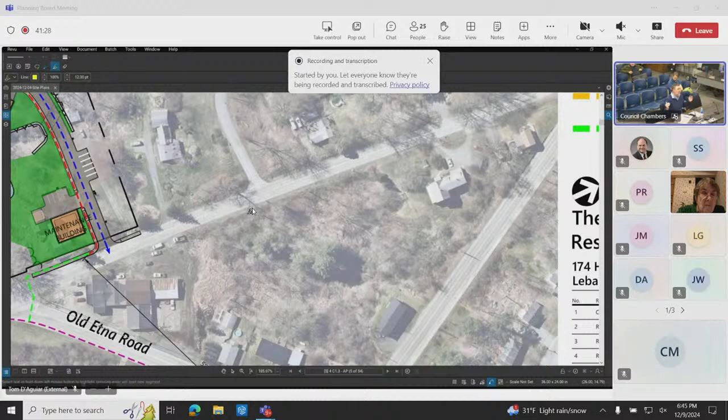Again, surprising that there's no public sidewalk there now. But that's something that, in talking with the applicant, we put in the PBAC response letter—there's a commitment to, whether it's funding or studies, because if you walk that, it's a steep slope down the side, there's wetlands, no right-of-way survey has been done. There's a number of unknowns there, so there's not really a position to commit to constructing anything, but I think it'd be important, whether it's part of this project or part of a city's future plan, to understand what's going on. I think there was some commitment on the applicant's part to commit to doing those studies, or working with the town or the city with a kind of fair share contribution there.

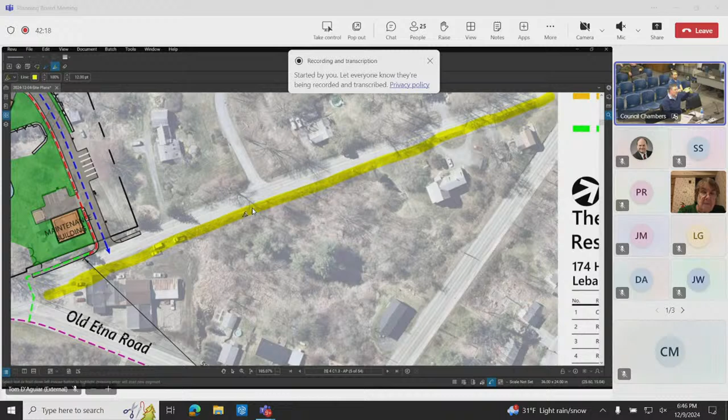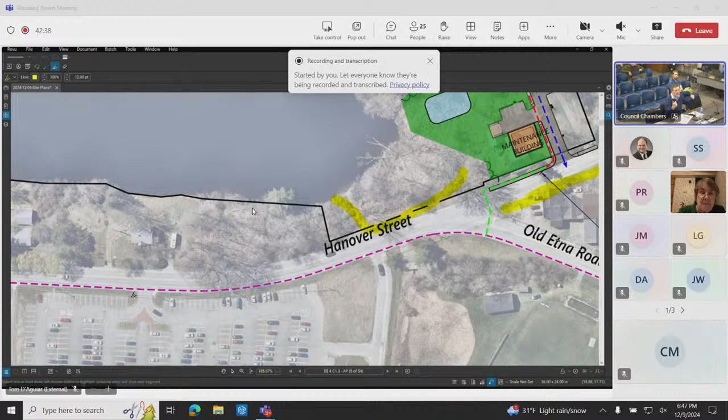I'm not sure what the benefit of wetlands or clearing trees or taking away any screening from the residents on the west side of the street would get you when you have a duplicate walkway on the other side. So I think that's why we're focusing on the crossing and the potential to provide some additional studies or surveys

on the Hanover extension. Now, the crossing is the green line. That's the green, yeah, thank you for making that a little brighter.

And I think there were fitting comments about operationally, how does this work with crossing guards and things like that. But I think the important part is that people have to cross this intersection now regardless of the project, and this would be a benefit to get some defined crossing there.

And again, working with the city with the right-of-way there and getting folks across. It's another one we could look at, whether it's advanced warning signs and things like that. We've worked with RRFBs up on Mount Support for the flashing. Those are all things that we can work with the city on. But the way we're looking at this is that we're committed to doing this, but it's within the city right-of-way. We want to make sure that it's something that's fitting with the city's designs and long-term outlook for that intersection.

So again, the project is presently committed to enacting the green line to create the crosswalk, ultimately crossing Hanover Street and then crossing Old Etna.

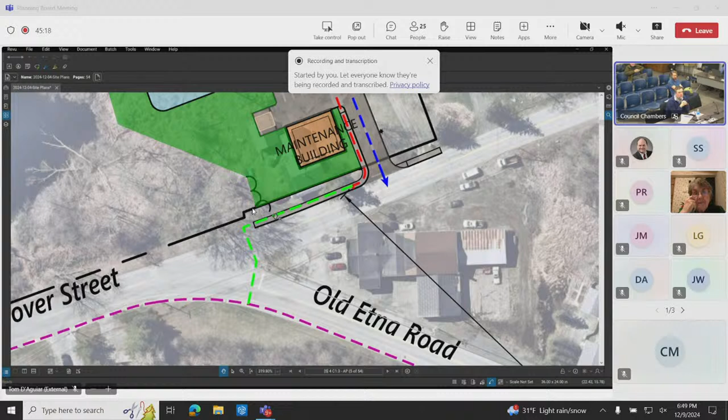Mr. Chairman, if I may, there's reference in some of the paperwork to an island in that triangle, and I just can't tell where the island is, can you zoom in? What is meant by that? Yeah, it's really hard to tell.

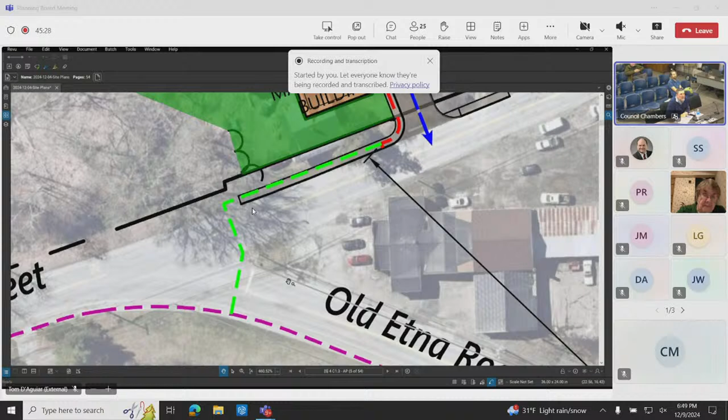So basically, can you just outline that, Tom, do you mind? There's an existing island out there, so you'd want to have the crosswalk come and then have a little refuge there to come across, just so you're not crossing two streets at one time.

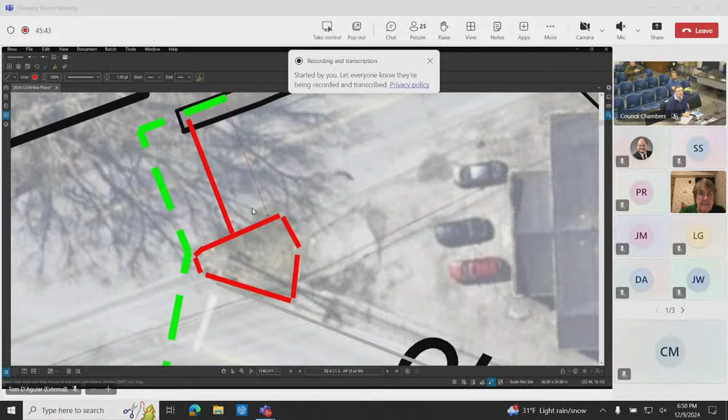Okay. And this is why I'd like to see it in the plan set, because then we'd have detailed scale. I guess I could put it in as a draft.

There's some right-of-way, potential coordination with the owner that the city would have to do, because that right-of-way goes right to that corner for the property of the garage.

Just be aware, to address Mr. Fort Burley's comment, you can craft conditions precedent whereby an applicant can come back to the board with final designs related to any one or more of your conditions. So just be aware that that's a possibility.

I don't recall there being a fulsome presentation of the walkability and the way that that's being handled. I don't think I missed it, but maybe I did.

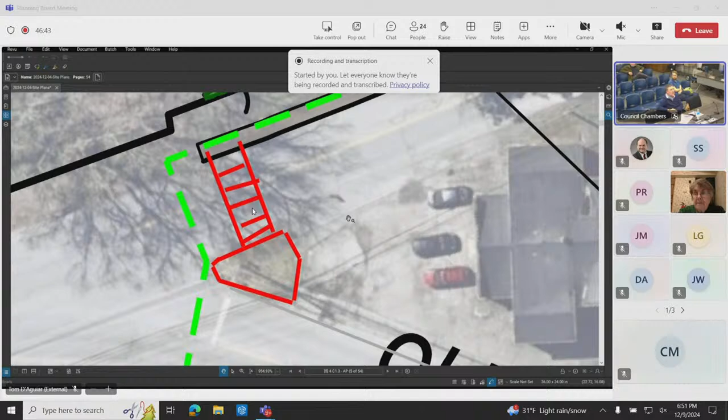Well, yeah, if you zoom out, Tom, this plan was included in the plan set, and I thought we walked through it, but basically there's the full sidewalk on the east side at Hanover Street. That goes down to Old Etna, and we pulled this plan together too to show some improvements that you would be adding above and beyond existing conditions.

Yeah, and those are all existing there. Okay, and then our crossing of Hanover Street is a new one. And our crossing at Old Etna in Hanover, that extension that goes from there, the Old Etna crossing up to the property line.

And then that walkway goes up, and we've shown parking for trailhead parking, but that's also accessible through a walkway to come up that parking lot.

But anything we do for crossings will include the MUTCD standards for advanced warning signage, like crossing ahead. What is the stop control you just mentioned? Stop signs. No lights.

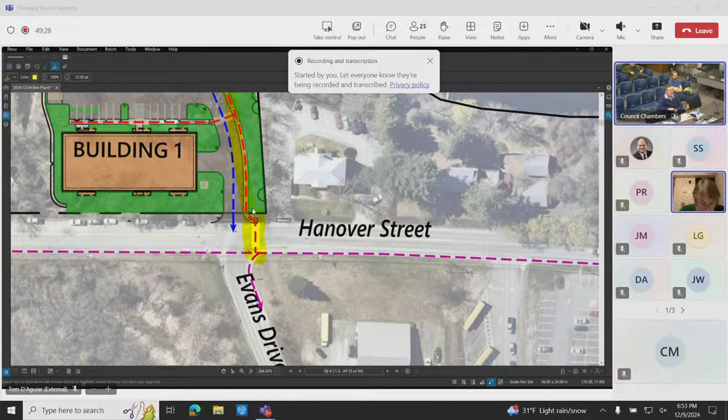In a related question, if we look at the south end of Hanover Street, there's that pedestrian bridge. I'm wondering if the applicant has any interest in aesthetic changes between the development southern access road and the pedestrian bridge, possibly including lighting, landscaping, signage that would indicate to residents of this new development how easy it is to get to downtown, like some wayfinding.

Promotional wayfinding, maybe something to make it look shinier. If you look down that street now and didn't know what was there, it's not welcoming. It wouldn't have to be a whole lot to make it more welcoming, but maybe some lights and limited signs, some welcoming signs there. I think that makes sense, it's going to make sense for the residents anyway, kind of like how you'd manage traffic, we want to manage the pedestrian flow too.

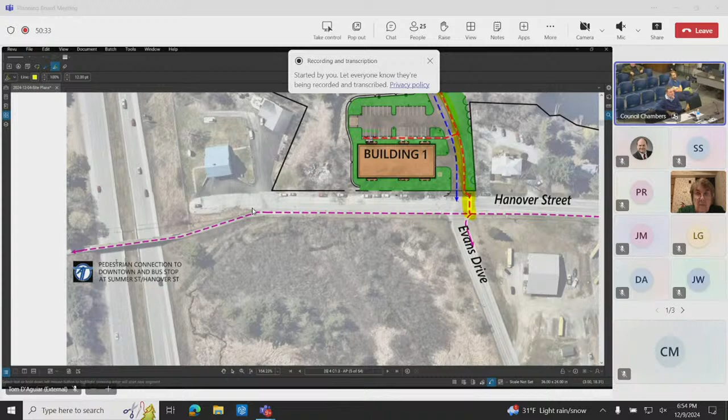Do we know who owns the piece of property that immediately abuts that bridge? On the south side, find out. On the east side it's the car dealership. It's wetlands all the way there, I think. You go off that edge and it's immediately wetlands down to the road.

Does that require any involvement of those parties with respect to alterations of their property? Certainly would if you did. I made a side comment and missed the critical piece of the conversation, what are we talking about? Wayfinding, sprucing up the landscaping and other means of dressing up the entryway to the pedestrian bridge, making it more welcoming. We're looking to the applicant to provide us some support for that, however, he doesn't own the land.

Right, we can, as long as there's signage in the right of way. Yeah, how far does the right-of-way extend? It's not on the GIS, so I don't know. We can figure it out. If the GIS is to be believed, there is no right-of-way. Yeah, that's right, that stuff you never know, it has to get surveyed.

Yeah, we could assume it's a 50-foot wide right of way or something, but it's pretty tight there, I think.

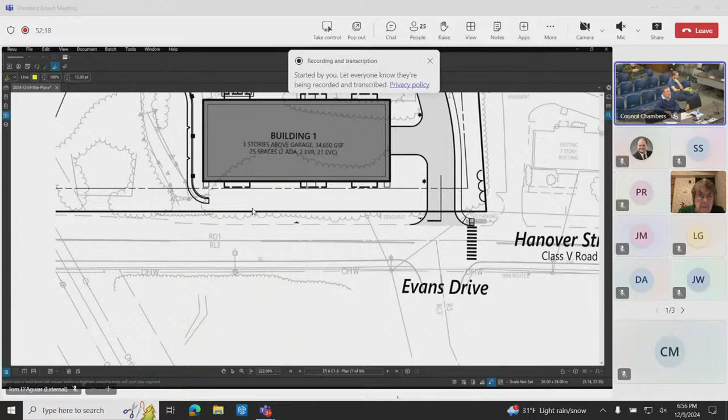You know that strip on the plan on the north or west side is the sophomore lot? That's where the sophomores park at the high school - there's 20 cars there, that's what they call it. During school, when the high school is in session, it's parked up full. In the beginning of the year not so much, but as people's birthdays turn and they can drive to school, it gets full. By the end of the year it's full. That's how things are and how they've been for a long time. I don't know if that affects any of our plans for that stretch.

You can see it on the aerial - yeah, that's the sophomore lot photo, there it goes. I can almost guess the time of year from the trees, but also from how many cars are parked there. In front of Building 1? Yeah, it will be in front of Building 1, from the old Comcast entrance basically to our entrance.

I have nothing more on walkability. Does anyone else have anything? I just want to come back to that island for a second.

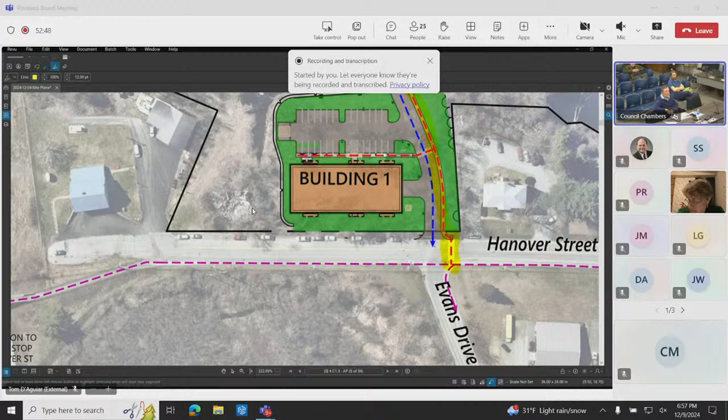So this is a straight shot just directly across the road at the southern entrance, right? But if I'm not mistaken, what was just drawn in at the northern entrance, that's a two-part crossing, is it not? It is, because of the limitation of the wetlands as we have to cross there.

Yeah, that makes it a more complicated crossing. Would you agree it's nice to have the island there, so people who can't make it all the way across have a place to stop, because it is a greater distance there? I'm wondering if that's the natural crossing of that road.

That's what I'm asking. The other problem you're going to run into is as you come down Old Etna Road to go onto Hanover Street, you pull very far forward because, if you're like me, you're not so flexible, and you're looking over your right shoulder because you have that angled intersection. So wherever you paint the crosswalk or stop bar, it may be disregarded.

I mean, I'd look at what people are actually doing. I'm not sure how to solve that. But if you draw it like it's drawn there - let's say, I would say if you continue it down when you get past the old Etna...

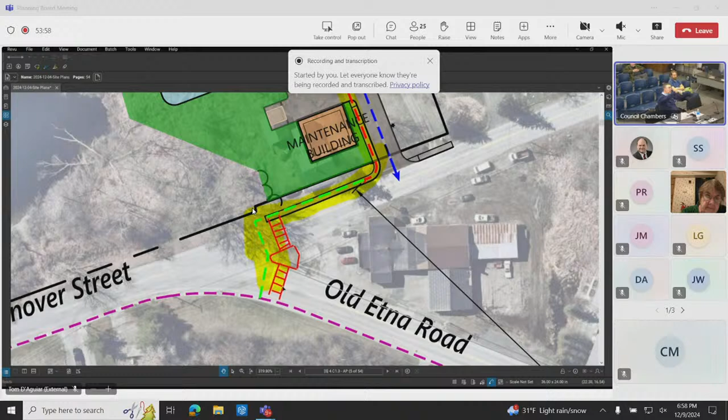...and maybe where the T is in Hanover Street, having a crossing over there, is that what you're thinking? I guess we'd have to look at the feasibility. Right now I'm talking about if you're going down Old Etna Road from the bottom right-hand of our image, up to, well, I'm saying that center would be a more optimal position.

It is, if you would have it down there. I mean, yes, you would have to fill in wetlands, but hopefully with more advanced warning signage and things like that for the crossing, and actually having something defined.

Yeah, I think that's a pretty wide open driveway for that existing owner. Yeah, it is a challenge. Another element that's probably not relevant - there is an open DES remedial site at that dealership. You're aware of that, so when you start digging, just know where the storage tanks used to be. We prefer you not dig at all there. Yeah, well, fair.

Anything more on walkability before we move on? Would traffic patterns be included? Traffic is next. Okay.

Also, I've got one more thing on walkability - the idea of the crossing guards. As far as the schools go, there is a crossing guard presently at one of the intersections. There is not one, I believe - someone correct me if I'm wrong - at the northern one. There are students who cross that way, not as many as cross at the southern one.

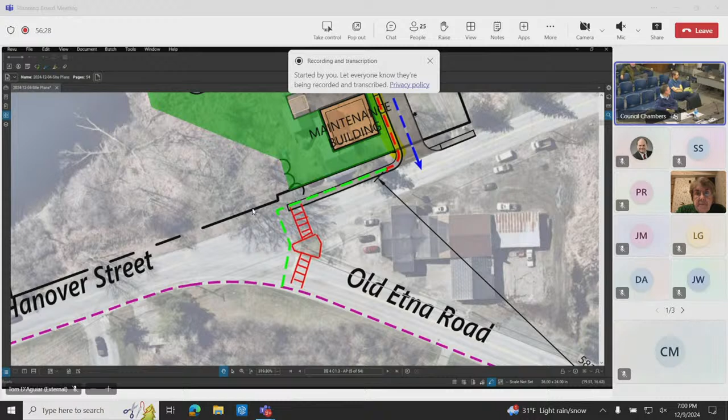Well, not exactly, one's already there, but the crossing guards, to my understanding, are hired by the schools. I thought so, but are they hired by the city? Because there's an ad on the city website for a crossing guard position. I thought they were, but I never looked into it, I just ran into that by chance. But right now there's an open position. I had assumed it was the school district also, because it's been covered in a pinch by the police and by the school principal.

And I'll go back to the layout of the driveway entrances and distribution. The intent would be, where we're showing that crossing, that folks are coming out and taking lefts—not there, can you go to the north one—that they'd be coming out and heading left, because anybody heading down Evans on the other side would be coming out the southern entrance and going straight across. So these are laid out to try to minimize the traffic from the site between those two driveway entrances.

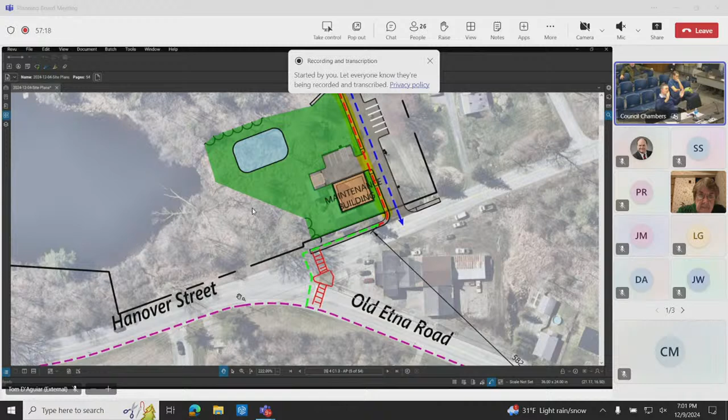Yeah, it's gonna create, for most of those kids, a driveway crossing that may carry as much traffic as the public roads in the morning rush hour, between 7 and 8. And it's not necessarily the case that they'll turn left, because the other direction's intersection is sort of congested. So if I'm in a hurry trying to get to work, I might just head down Hanover Street and take a left onto Evans to get out quicker and avoid Heater Road. Right, it's not completely eliminating it. It won't be all the traffic, but not everyone will work at the hospital, and some will come out the north entrance and head toward I-89.

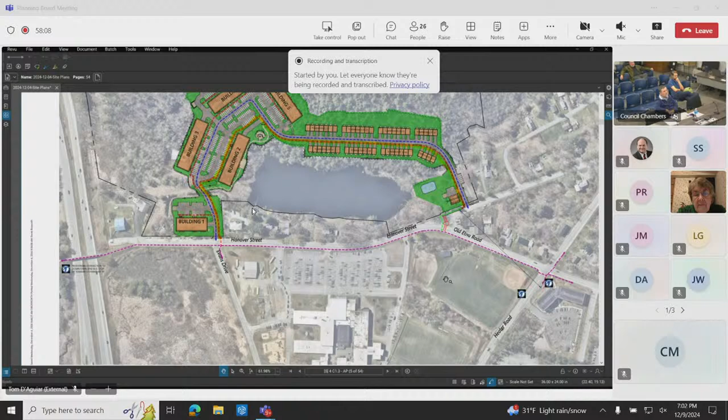Can we double back to the lights, just by virtue of the concern that's been raised? These lights flash, and the command is to stop on flash—is that how these lights work? Like the ones in front of the middle school, yeah, the push-button ones. You push a button, the lights light up, and there's a sign that says stop on flash. Okay, thank you.

Is it okay to ask a question about the parking places just inside the north entrance there, and walkability? Because that's advertised as a place where people could leave their cars to go up to the trails further up. Yes, those parking spots are available to the public. All six of them, that's all—those have all been added for trailhead parking.

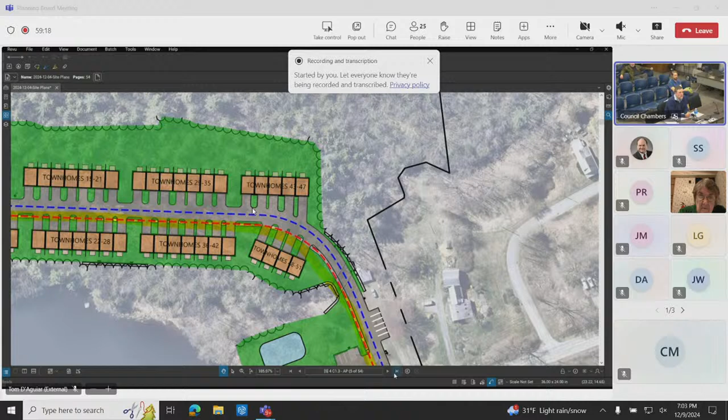Okay, I have a quick question about the trailhead actually. Can I jump in on that? Very quickly, sure. I noticed on Plan C2.3 there's a trail listed as approximate Upper Valley Mountain Bike Association Trail Connection. Does that trail connection stop at the end of the property? No, there's already one up there in the GIS, so we wanted to add the extension to show how you could connect to it. So it does connect all the way up there, because there's a trail network up there that seems like it's on the other side—it's a very large expanse. So we took that to show how you get there, assuming people are using a similar route.

Is the applicant proposing to construct that trail extension—clear it and make it walkable? You can see where it is, that yellow line is where it is. So is the applicant suggesting they're going to commit to clearing a trail not only up to their property line, but to work with, I believe it's Dartmouth that owns that property, to clear a connecting trail all the way up to the yellow line?

That hasn't been anything we've discussed. Would that be something you'd entertain? It'd be a lot more connecting to the trails if it actually connected to the trails, if you know what I'm talking about. Yeah, could you jump in on that?

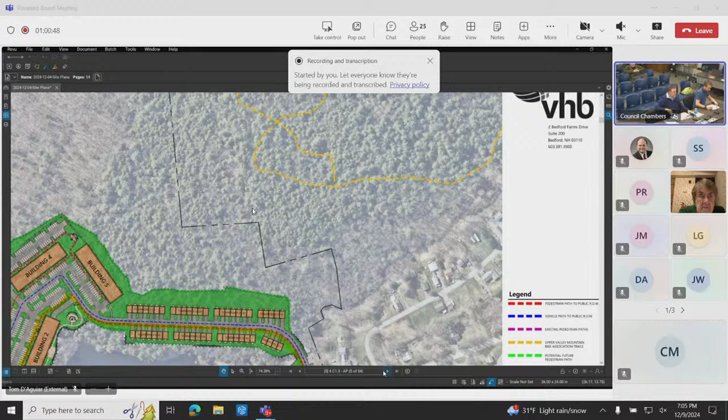If you wanted to come and actually talk into a mic, just so Paula can hear, and you'll need to say your name as well. My name is Sean Dietrich, I'm a member in good standing of the Pedestrian and Bicyclist Advisory Committee.

In the letter from the applicant responding to our committee's questions and comments, they stated that 6 parking spaces have been added at the southern driveway to allow for public access to the trail networks, and a connector trail will be provided to the existing trail network. This has been clarified on the updated site plans.

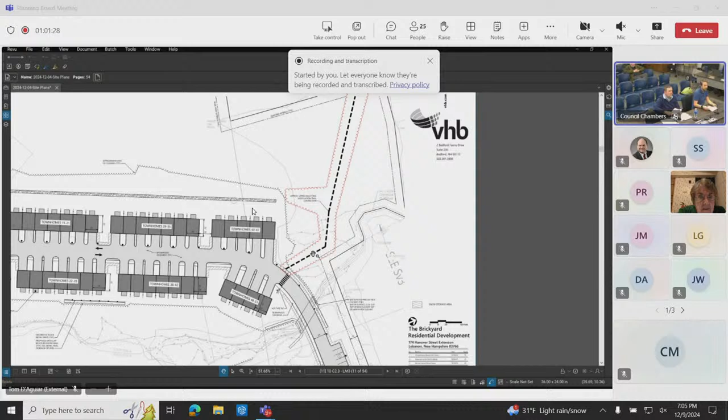So I guess there's no commitment beyond the property line. Do you know if the trails are some distance from the property line? They're not very far up. Is it the northern entrance? Yes, the northern entrance.

There's one trail specifically that sort of loops down, makes an arc towards the proposed development site, and gets pretty close to the edge of the property line. From what I've seen, yeah, it looks pretty close.

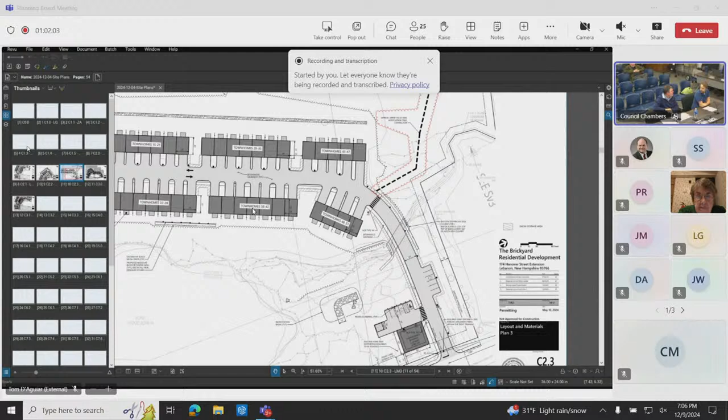Do you work with the Upper Valley bike group? Not directly, but I know on some of the other properties they've asked for access to work on the trail, so that's something we could reach out to them about. I really think they're actually constructing the trail at 343 Mount Support. Oh, okay, cool.

On Table 7, the capacity analysis shows the 2025 no-build and 2025 build scenarios at the intersection of Hanover Street and Evans Drive. The Evans Drive westbound approach is currently level of service E, and with the build it'll be level of service F. The south side driveway eastbound approach, which I believe is the south exiting, where everybody's just assumed to drive straight out of the development onto Evans Drive without complications, I don't understand why that level of service is an F if it's just as simple as driving straight through.

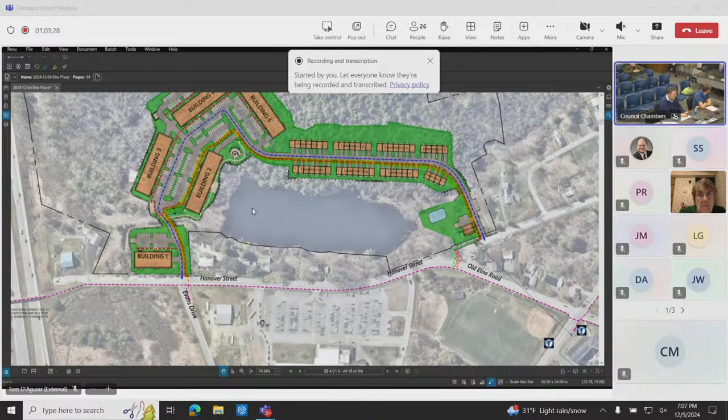We've got Jason Plord joining us on the phone. Can I make a request, if possible, for the applicant to zoom in on the intersection being discussed, and as you were doing with the drawing of the intersections and crosswalks, draw the movement we're referring to? I think that would be very helpful, at least for me.

So very quickly, the difference at this intersection of Hanover Street and Evans Drive shown on screen is that we're proposing a fourth leg to the intersection, whereas over at Old Etna and Hanover Street, that's just a three-legged intersection. When you introduce an additional leg to an intersection, you introduce additional vehicles considered conflicting movements, and that affects the operations of the intersection.

So if this says south side driveway eastbound approach, isn't that the people exiting from the new development? Correct. So why is it a level of service F if it seems like it's just simple, going straight forward? When you have a single lane approach, all the vehicles are in one lane, so it doesn't matter if people are turning left, going through, or going right. If that first car is going to turn left, even though most people are going through, any second or third vehicle trying to get out is going to be stuck behind that first vehicle trying to turn left out of the driveway.

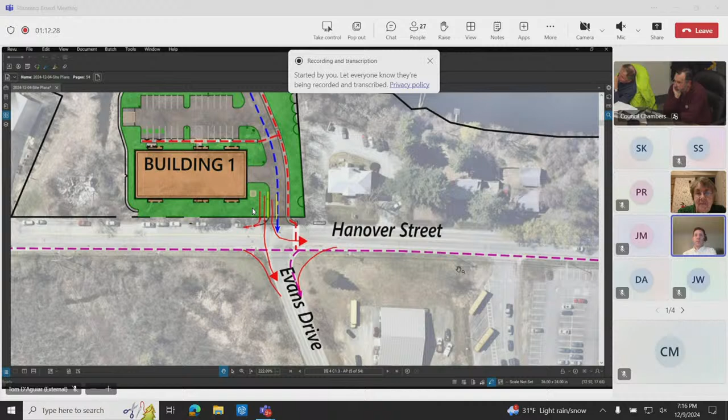What if you just make it a no-left-turn allowed and force everybody who wants to turn left to take the north exit? They certainly could do that. I think that by placing this intersection under an all-way stop, that's a big safety improvement for this intersection. I agree. And with that, introducing the crosswalk, I think that's a win—that was something we had talked about early on in the process for the development program, that the city was actually considering placing this intersection under an all-way stop.

Jason, can I interrupt you real quick? Tom, is Weston and Sampson on the line? Yes, they are. Can we just get— it'd be nice to just absolutely get some— yeah, because you're talking, feel free. Again, I appreciate the extra detail, just want to make sure Jason's following the protocol. It was reviewed—I just wanted to make sure we're not venturing too far off from what Weston Sampson has reviewed and already provided input on. So I don't know who's on the line.

Hi, I'll introduce myself—I'm Doug Osler, I work for Weston and Sampson. We're contracted with the planning board to provide our review and recommendations regarding this development, as well as to help assist in interpreting information so you guys may be better informed when making decisions.

I did hear some discussion about the all-way stop versus having additional lanes. In our opinion, when reviewing this particular location, we agreed with the improvement of an all-way stop, particularly for pedestrians crossing the road—school-age pedestrians, and any biking over that overpass getting to school. It just creates a better condition for the crossing.

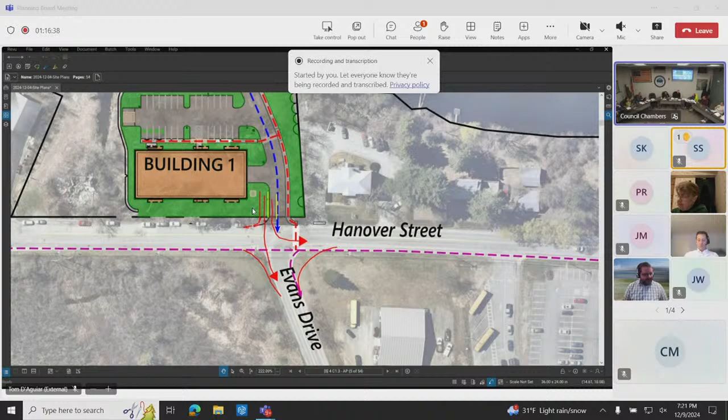The thought I had before Doug joined was that a four-way stop with a single lane at each approach point would be a more predictable experience for the pedestrian. Unless we're planning to go multiple lanes governed by an actual traffic light, which is not in the plan, we may have the best option that safeguards pedestrian safety at the crosswalk.

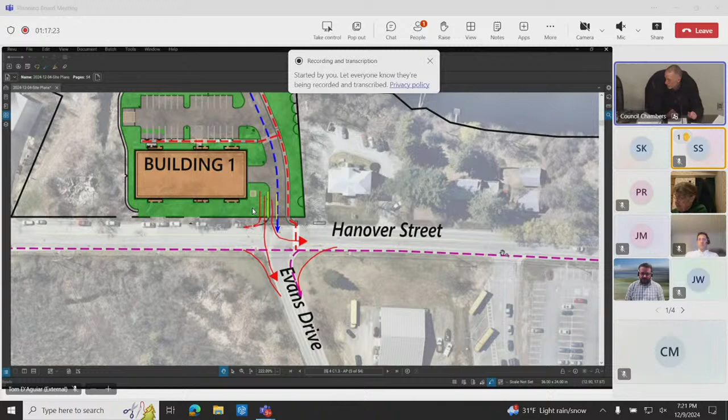Other traffic questions? I have a couple myself but don't want to step on others' toes. With respect to a pending study on Route 120 and its potential effect on the development, is there precedent for the approval to have a caveat that this study is outstanding and that you might be re-invited back to the design? Well, I think we have a scenario without the 120 improvements, right?

Correct. So our opening year conditions, the 2025 conditions, do not incorporate the Route 120 improvements along the corridor. The 2035 conditions do include the Route 120 improvements.

And just so I get this on the record, the traffic study has been submitted to Chris Turgeon at the New Hampshire DOT district office, so DOT does have a copy of our traffic study. I think your question is, if in 2035 that project gets pulled, what's our evaluation, our recommendations and mitigation? What does that look like in terms of future proofing for the city with respect to the plans you're pitching for this development?

And do they reasonably cover the present conditions as well as the 120 happening or not happening conditions? I hope for all of you that the 120 improvements happen. It's got to happen, right?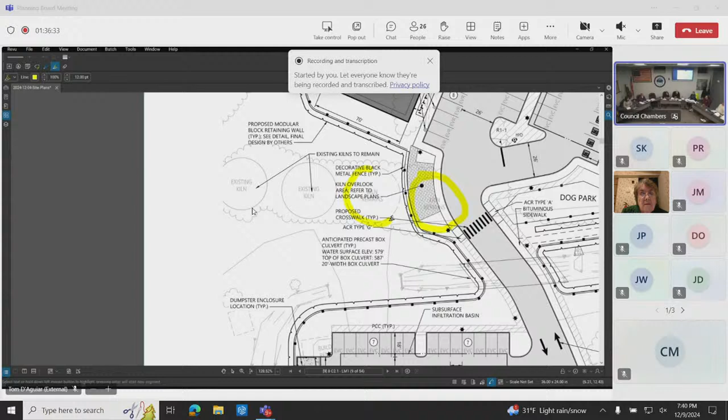Does that include all open space? The whole PURD definition of open space? I wasn't going there yet - I actually have a very pertinent question that I think needs to be asked today so that it can be addressed.

May I just make one comment about the kilns? Yes, please. Another resource we still probably have in the area are some of the people that actually worked there. If there was research being done or work that needed to be done on the kilns, there may still be people alive and around who've done that at that site, and which might be known to people on the Heritage Commission.

Well, in the film of this - but as far as the developer being able to, or the developer's consultant being able to contact those folks, it would be through Heritage, correct? Or through watching the film. Probably, but not through the board - we don't have those contacts. Thank you, though, Kathy.

There was a comment made earlier in the hearings about preventative maintenance for the inflow and outflow of the pond, at the points of crossing. We would probably want to see it as a condition of approval that there would be a maintenance plan for that. I know the developer has been very responsive to the as-need calls from Dr. Croner. But for this, we would want to see a condition of approval around a preventative maintenance program. And this will have an AOT permit associated with it, and as part of the AOT permit, there's a required operation and maintenance inspection. So there'll be regular inspections of outfalls and things like that.

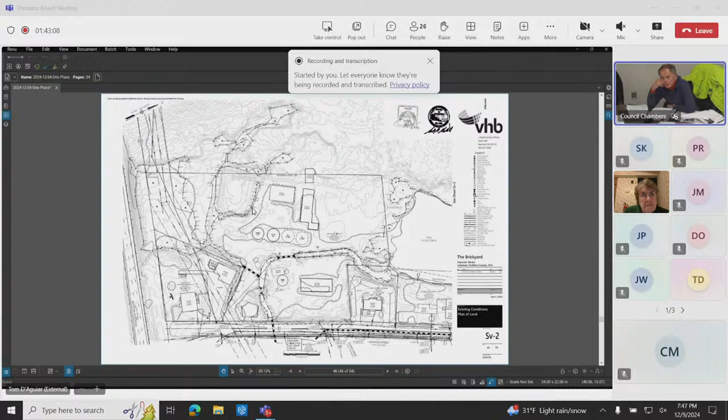As I understand from some site I found on the web, there's a lot of oil or grease deposits in the soil down in the areas of the kilns and the buildings that are there, and I haven't seen any comment about the soils at all. We had a phase one environmental study. I think most of the hits on our site were really more related to monitoring the gas station from Gillies Auto. I think DES has closed most of the instances that are on this site.

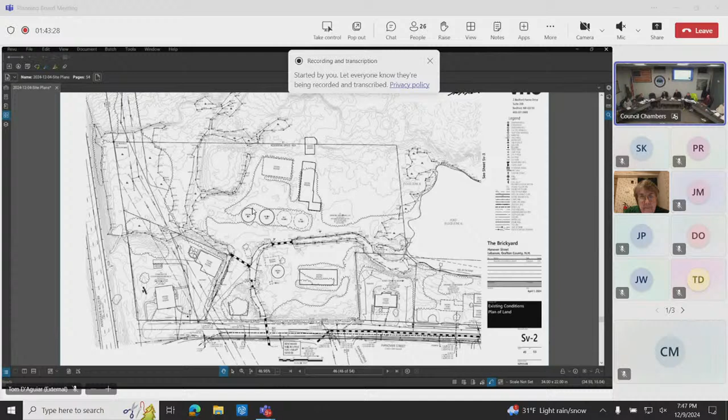Gillies Auto is the one at the north end? Yes. Yeah, we have a phase one that's been done. I think it had largely to do with the Brickyard area and not with that area up there, so whatever I saw on the web. Okay, well, so can I just confirm - we had a phase one done that I think demonstrates that those have been closed by the state, but we can confirm that. Okay.

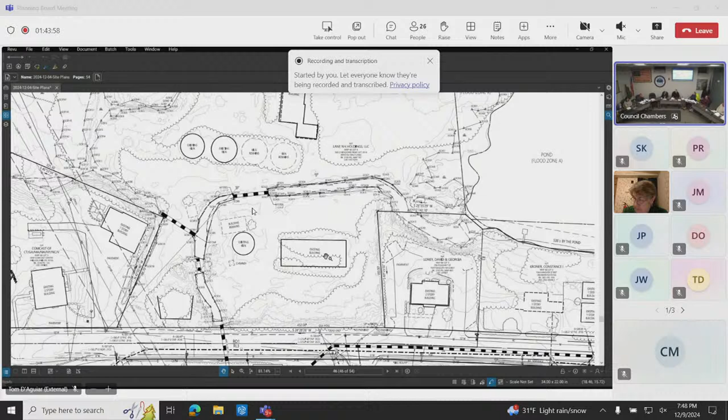At this point, I'm just going to open it up. Is there a last call for other questions from the board to the applicant? I did have one question that I thought might be needed in order to close this, about the open space, specifically referring to the ownership of the open space.

I think I need Tim's input on this as well. It looks to me from the regulations that there needs to be a plan for the ownership of the area designated as open space. It gives five options in the regulations, A through E, E being other ownership structure deemed by the city attorney to be legally adequate.

What's the plan? We would do a defined easement. A defined easement, okay, I think that's where we'll finalize that. So that doesn't require new lot lines. Correct. They would still own it, and an easement would be granted as open space, correct.

So that means the site plan has to show how the open space is going to be physically delineated and distinguished from other areas. I think that will need to go into the site plan. Yeah, whether it's little signage or little walls, or what do you want to do? I just didn't see that on the plan, so I was trying to figure out what are we doing with that. Good to know, an easement and some kind of physical explanation on the site.

Yeah, I think we've done them in other areas where, like, every 50 or 100 feet, there's a little sign saying, this is the open space. Okay, enjoy, whatever works, I mean, they'll figure it out.

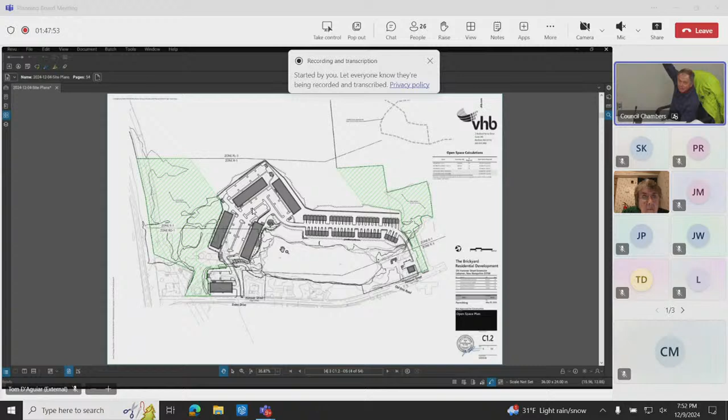I have a fun one to end with if you like, but I'll be the judge of that, a more serious one. I just wonder, do you have a graphic that shows, that would run through buildings 2 and 3, what the tops of those buildings are, how high they are relative to each other? Because building 2, if I've got it right, they're 45 feet.

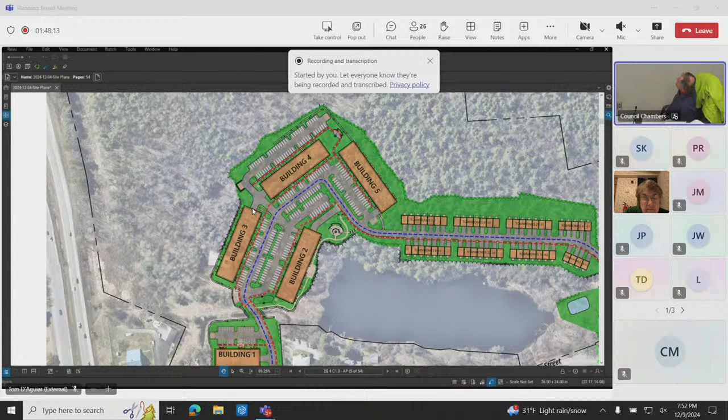They're both 45 feet high, but are the bottoms at the same level? At the front they are, in the parking lot they're the same height. But building 2, you can drive all the way around and go under, so there's underground parking there. But the elevations for building 2 and 3, at the tops, they mirror each other, are the same.

Tom, that's right. I think we might have run a cross-section, but not sure if that was part of our last presentation or not. That just seems sort of odd that building 2 was in fact higher because of the garage. No, the garage is buried.

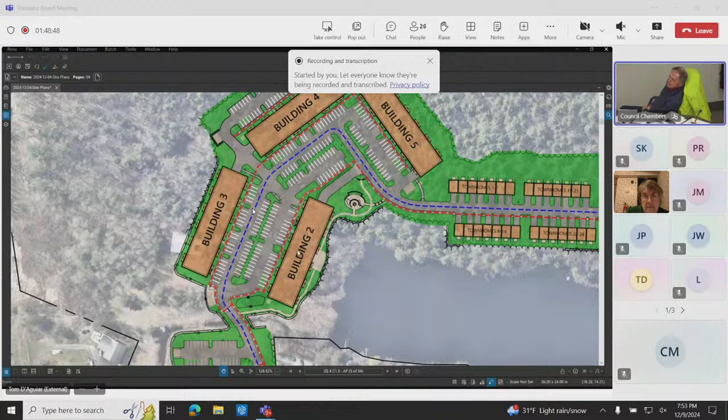Okay, so when you look at it, it's just two 4-story residentials, I think. There's a rendering that shows it. Yeah, do you have that rendering? Some elevations.

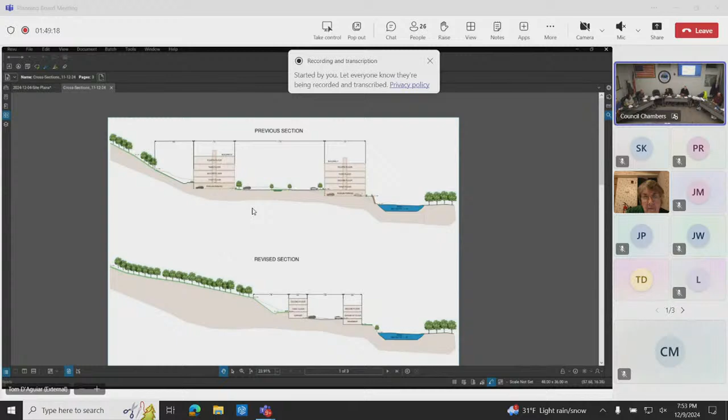This is more to show the relationship between the pond and the hill. Let me see if I can pull up a rendering that has an angle. I think we had one that shoots right down that area. All right, just give me one second. Here we go.

Yeah, so that parking is underneath, and then there are 4 stories of residential. Or, one has—sorry, I should clarify. The one on the left has a deck, and then 3 stories of residential on it. The one on the right has 4 stories of residential with the parking buried.

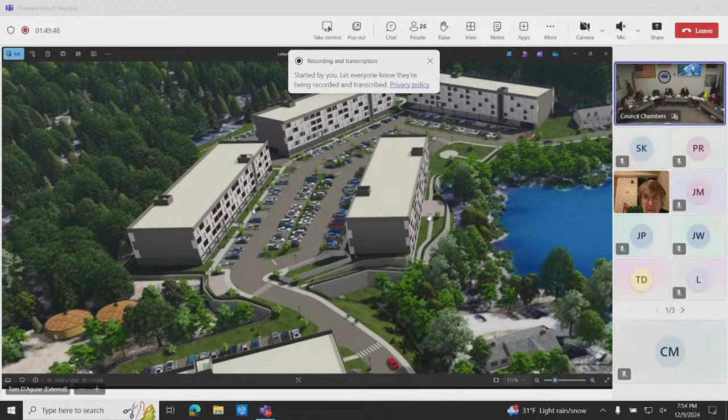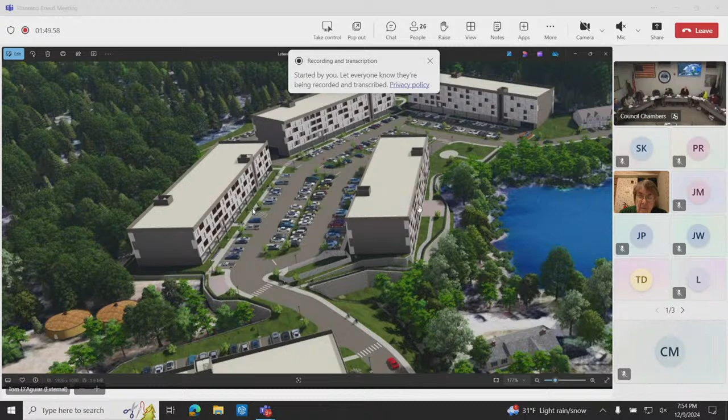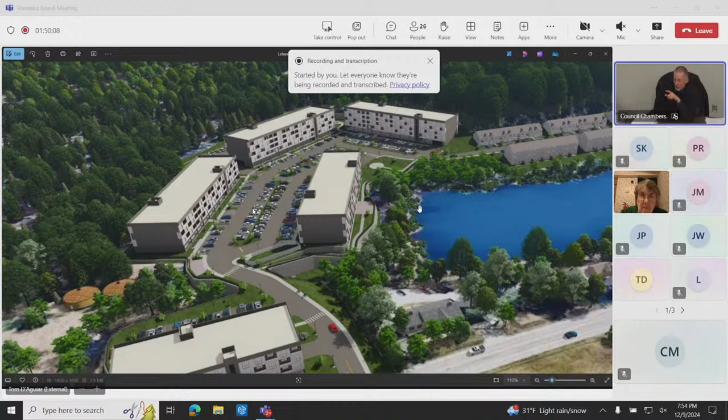Right, so one has three levels—is there 4 levels from the parking lot level for each of them? One's just 3 residential, one's 4 residential, one's on a deck, and one has a buried deck. This looks like, if I'm hearing you correctly, there are 3 buildings that have 4 sections of residential. Yeah, the 2 in the back that we're asking for a conditional use permit on, those are 4 on top of a deck. The one on the pond is 4, but the deck is buried, so we didn't need the conditional use.

And then buildings 1 and 3, we couldn't go above 45 feet for those, so we didn't ask for any relief. Got it. An aesthetics question?

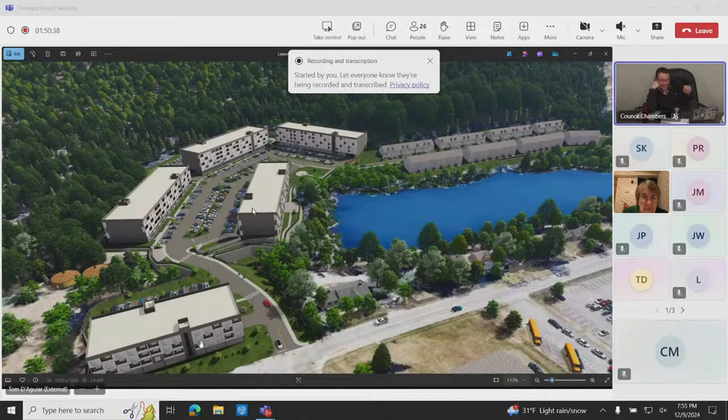Sure. The elevations now appear to show brick patterning. Is that likely to happen? Correct, yes. Okay, and will we get to see elevations of the townhouses? Yeah, we'll provide them. Okay, and lastly, about the townhouses.

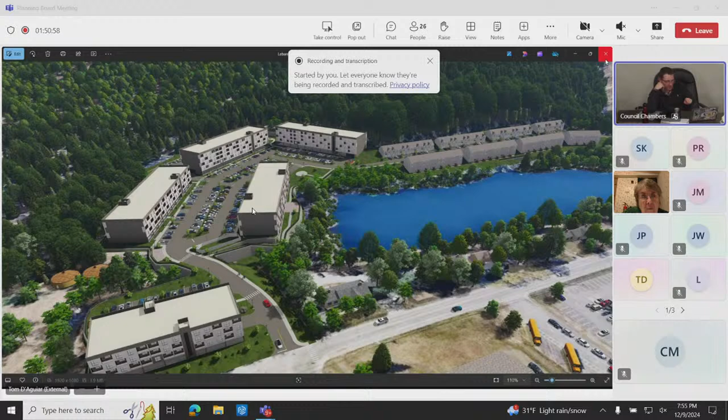I believe I clarified this last time, but are you amenable to a change so that instead of having the townhouses built after Phase 3A, so that we don't have to wait for whether or not people want to buy or rent single-bedroom units to build townhouses? It seems like the markets are very different, and it would...

Before we spend too much time on the phasing plan, I should probably coordinate with the applicant on that. Yeah, I'm going to say we're updating a phasing plan. That's a beautiful segue into prepping for our next time together.

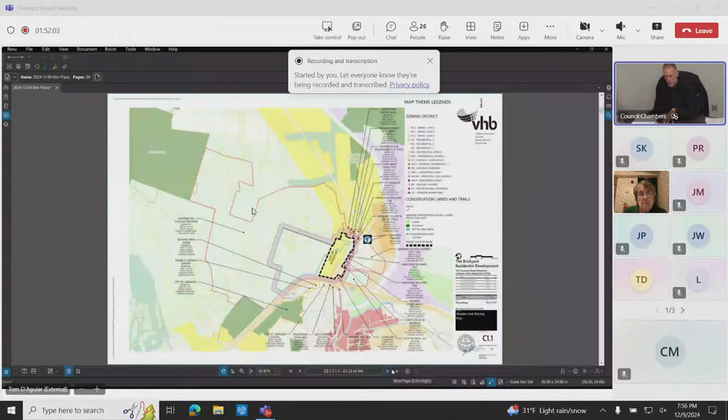In my notes, I have that between meetings the staff and the applicant would get together for clarification on what waivers are really still in play, likewise cleaning up some of the phasing wonderments—those were the big ones. And likewise, the board and staff can do some crafting of conditions of approval, and staff can shop conditions of approval language to you gentlemen as well, so that when we arrive back here next, we have a good fighting chance of actually getting out the door.

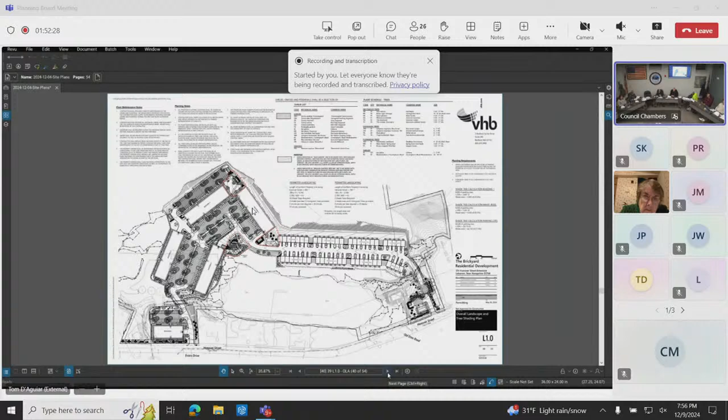And we didn't get to talk about it, but I just want to highlight in the plans, because there wasn't a lot of substantive change to the plan, but our landscape architect did put a lot of detail into the amenity spaces. There's really no industry standard, it's kind of just what's common in the area and what's been done. But I think when you dig into this, you'll see there's been a lot of thought into making these really nice usable spaces. So I just wanted to highlight that, because I was paying attention to it—I like them.

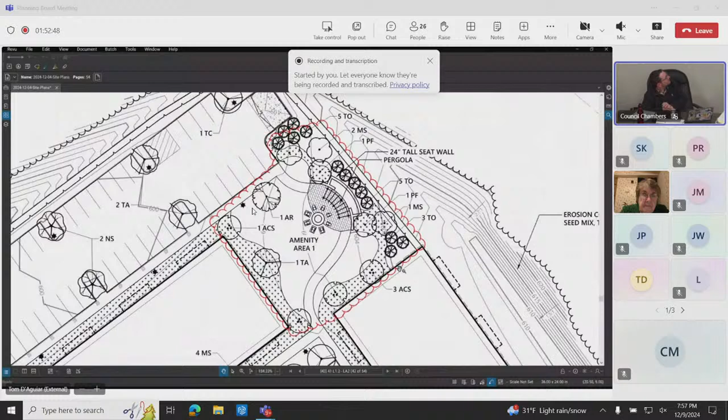Because there wasn't anything else in the plans related to that. Steve Keach would see the differences, but the scoping of who was intending to rent in those mid-rises has changed a lot. It no longer has 3 bedrooms, and therefore there is not necessarily the same demand on that type of social space.

Okay, the last item we need is to formally request an extension so that we can meet together next week, or in January, at whatever the next meeting is. And also, we should think about whether a week is a sufficient amount of time for the sorts of homework we're talking about in between, or is January a more practical target, January 13th? And do we have too many conflicting other things on January 13th's agenda?

Our preference is December. Does the applicant, is the applicant comfortable that this can all be wrapped up in the next couple of days so that we can get through this?

The things we see pending are your comments, and some of the comments given here overlap those. I mean, do you think you could get a revised plan set in by the end of the day on Wednesday, so that we can get the agenda packet out on Thursday?

Tom, I'm saying yes for you, right? Staying on mute. It does sound like it.

I think most of Tim's comments were more, like you mentioned earlier, clerical in nature, as opposed to wholesale plan changes. So I really wouldn't expect much from a layout perspective or the meat of the project, and we are actively working on it right now. So I'd like to say we can aim for that, just knowing how much work goes into these plans. Yeah, the target, we'll say the end of the day Wednesday is the target for that.

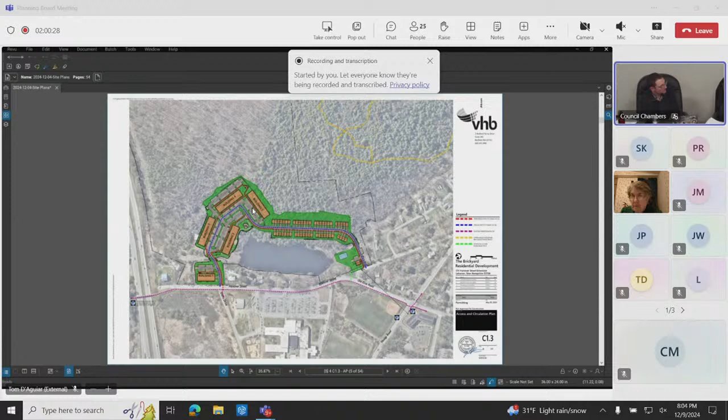We have the request in for the extension to the 17th—I will officially request a 40-day extension. Let me know if we need to put it in writing. I'll do that in the same email. Awesome, that being done, we will continue this meeting to Tuesday, the 17th of December, this agenda item, at 7 o'clock in this location.

Let me just make sure this room is open—there's nothing else going on on the main schedule. Great.

Thank you, have a very long evening. Thank you, gentlemen, much appreciated. The holidays—there's less conflicts.

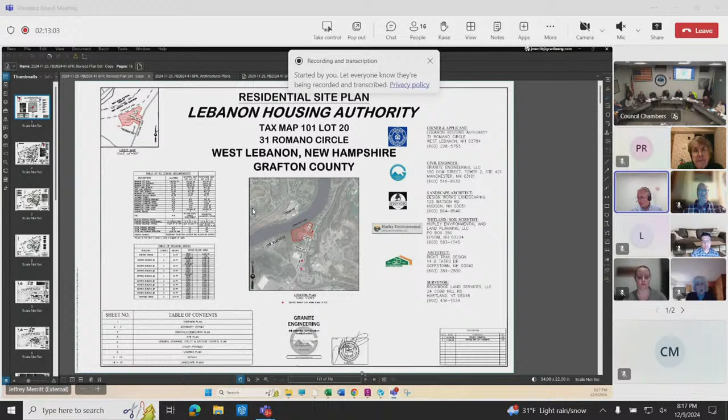Sure, let me get through the meat of it here, and if the board has questions, please chime in. I think the board will be familiar with this property at 31 Romano Circle. I'm going to flip to the overview plan here. This property is owned by the Housing Authority; they've owned it for many years. The city references this lot as Map 101, Lot 20. The entire parcel is located within the Residential 2 zoning district. This is roughly a 9.5 acre parcel of land.

We have frontage on South Main Street here to the southeast, and we also used to have frontage on what's called Romano Circle. For those familiar with the property, Romano Circle was recently discontinued. Since its conception it was actually a city roadway, but it was a cul-de-sac that served just this property—quite unique to have a city road servicing only one property. Recently we petitioned the city to discontinue that street, and that's been granted, so Romano Circle is now a private roadway. Nevertheless, that same street, private or public, is how we access the majority of the development here.

Also notable on the plan is the Connecticut River, our abutter to the north, or our boundary to the north. Because of the Connecticut River, portions of this property are actually located within the flood zone. As you can see, there are a number of buildings on the site—8 structures containing a total of 46 multifamily rental units spread across those 8 buildings. There's also a building right here which is an existing garage, a maintenance building for the Housing Authority.

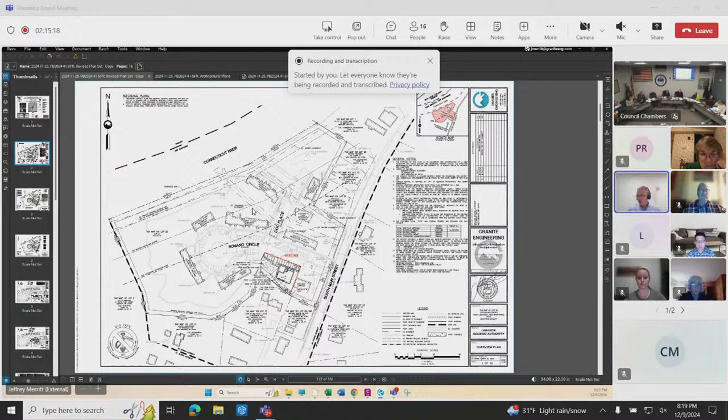Our proposal is shown here on the overview plan as well. Again, we have a very large piece of land, about 9.5 acres, but we're working in a very small area. This red highlighted area on the overview plan is our project area, about half an acre or under, representing about 5% of the overall property.

Let me flip to one more sheet here. This is the site plan, which is a zoomed in version of that red square I just showed you.

The project is to construct a new office building. Right now, the Housing Authority operates out of an office building that's within a building with multifamily units in it. This office is too small for the Housing Authority's needs, and the project proposes a separate standalone office building. As proposed, this is a 2-story building with a gross floor area of 3,882 square feet. We've positioned it towards the entrance to the property off of South Main Street, right adjacent to the other building the Housing Authority uses for maintenance, which is the garage.

So it's kind of front and center here where it should be. As part of the project, we're proposing an additional 12 parking spaces along Romano Circle, similar to how it is on the other side of the access roadway and throughout the cul-de-sac, including 2 handicap spaces with an accessible route to the new building.

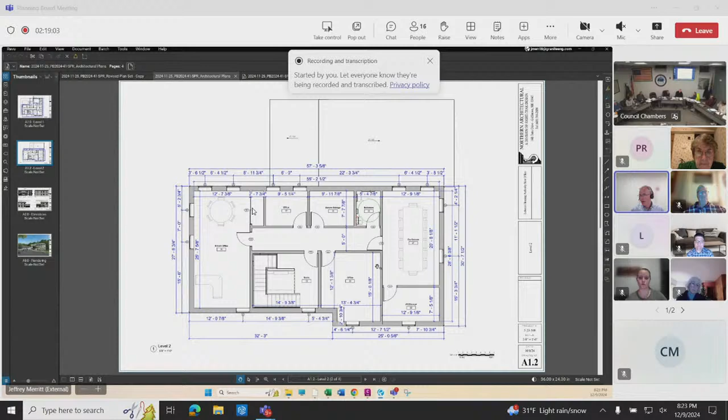We have a second floor plan which shows the conference room and office layout on the second floor. And then we have some black line elevations showing the different sides of the building. This one in the top left is what would face the parking lot, or Romano Circle. This is the back of the building on the right-hand side. This is what faces South Main Street, and this is the view that basically faces the river.

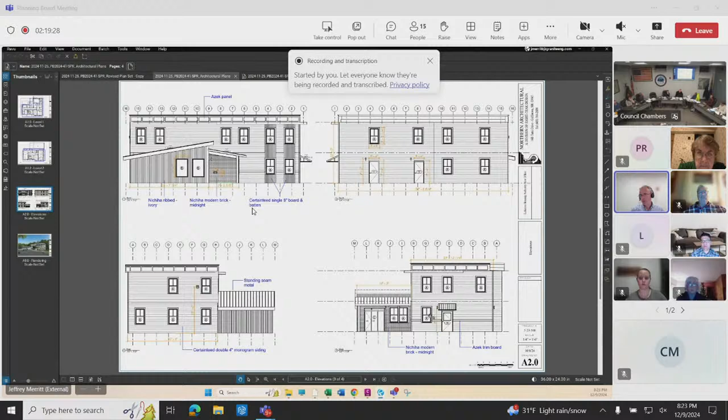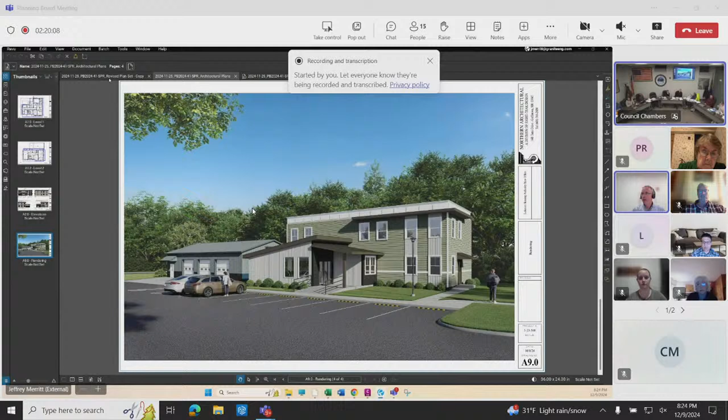Moving back to the site plan and specifically the waivers, Mr. Chairman, if it's okay, I'll go through those quickly. There are 3 waivers that we hope the board would consider granting for the project.

2 of the waivers are specific to the project area, that red area. And then there's a 3rd waiver, which is basically just a general waiver for all those areas outside of the red area that form the property, but the areas that we're not working in. So I'll start with the general waiver. We'll come back to the overview plan here.

So you can see the parent property, again, is 9.5 acres. We're only working in 5% of it. We're requesting a waiver from Article 6 design requirements for the areas outside of the red area there. Even though we're working in one small area of the site plan, the regulations technically apply to the overall parcel. So what we're asking for is a waiver from not having to comply with those regulations for the areas that we're not working in, that aren't part of the project.

We feel that strict conformity would pose an unnecessary hardship to the applicant. It would require a real detailed survey in the areas outside of the project area. It would require additional analysis, design, and certainly construction costs that could jeopardize this small-natured project.

We do think that granting of the waiver would not be contrary to the spirit of the ordinance. Portions of this property have gone through prior site plan approvals with this board, so applicable regulations were adhered to when it was originally permitted and developed. This is also a situation where this development has coexisted in harmony with the surrounding area for a better part of 50 years. So in part, if you read the purpose of the site plan regulations, it's to protect the public health, safety, and welfare of the city residents.

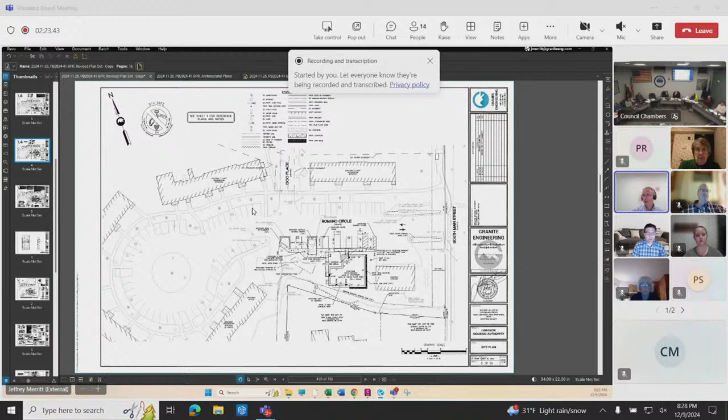There, right behind us, there is a significant topographic difference in elevation. Our site is roughly 42 feet lower than our properties to the south here. So we have a 42-foot vertical change that does the buffering for us, if you will. That vertical change occurs in a really very steep area and very steep slope, which is heavily vegetated with woodland. Not only do we have a 42-foot slope, but we have trees growing on it, which really screen the building from that direction.

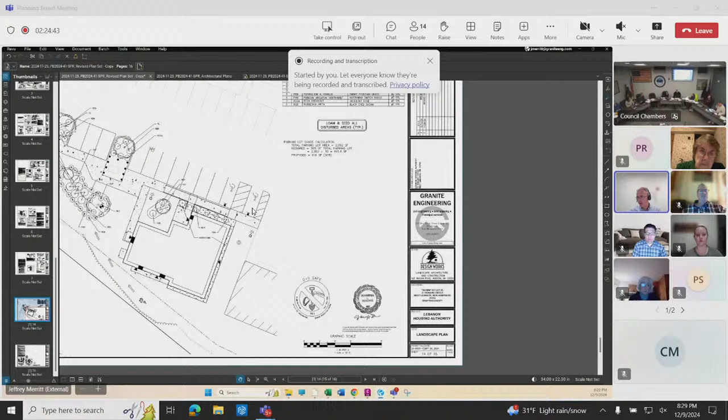Because of that specific condition of the land, we think granting this waiver carries out the spirit and intent of the regulation, and we'd ask the board to consider it for that area. And the last waiver request, again, is project specific. This is from section 6.2D, which is landscaping around the building. This section requires 10 feet of landscaping around the building. If you look at our plan, we have 10 feet to the east.

10 feet to the east. We have 10 feet to the back, and then we have 10 feet over here. We don't have 10 feet right here. We actually have 4, and then we have a little more than 10 feet in this area.

We've tried to provide the largest landscape buffer that we could. For us to provide the 10-foot landscape strip here, we would either have to push the building back into that slope, which would obviously not be a good thing from an engineering standpoint, but it would also push it over the rear setback. Or it would force us to eliminate the parking in front of the building, which would be the most logical parking for this, and narrow up the Romano Circle roadway that exists.

If the board remembers, there was a recent application, a lot line adjustment between this property and our abutter to the south, that this board approved maybe a few months ago. We've done everything we could to provide as much buffer as we could, including doing a lot line adjustment with the neighbor to the south. That lot line adjustment moved this property line further away, which allowed our building to be pushed back a little bit and provide some sort of landscape buffer or landscape strip here.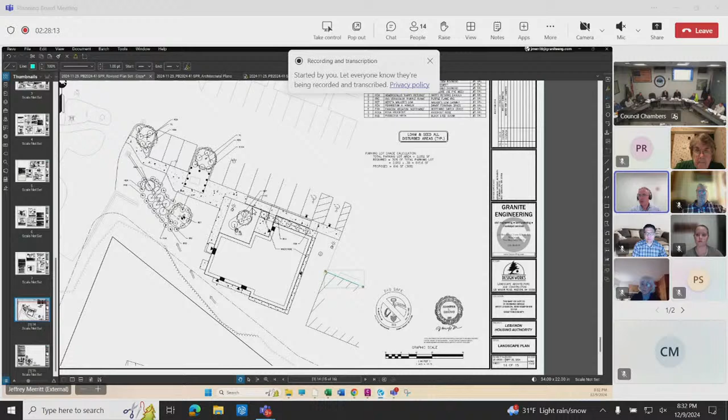Mr. Chairman, I appreciate you listening to all that. I know it's getting late. I will hand it back to you, and if you or any of the board members have questions, we'd certainly be happy to try and answer them.

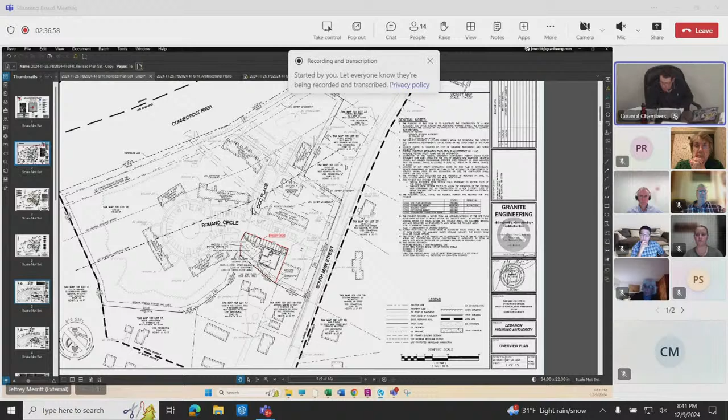Do you have a second? Jerry? Yeah. Yes.

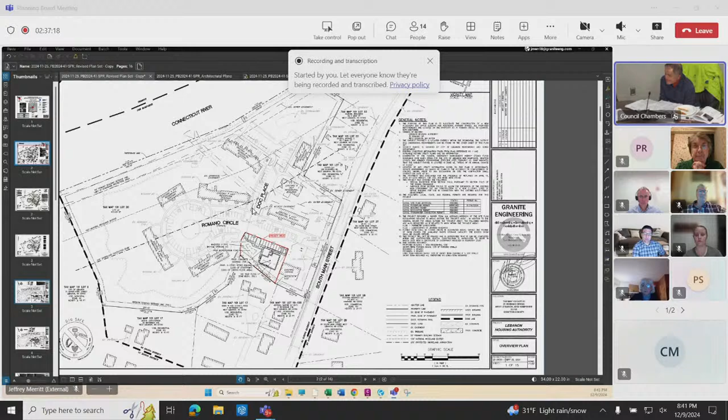Do a roll call vote, beginning with Kathy? Kathy votes yes. Ellen votes yes. Edric votes yes. Richard votes yes. Andrew votes yes. Jerry votes aye. Eric, yes. Brian, yes. It is unanimous.

Congratulations, thank you. Godspeed. We appreciate you guys. Thanks a lot. Thank you very much. Moving on, thank you.

Moving on to public hearing item 3D, Psychotti Holding, I'm sorry. Moving on to item 4A, conceptual review, Choice Storage LLC, 0 Etna Road, tax map 26, lot 17, CWN All Waste LLC, 40 North La Bombard Road, tax map 51, lot 10, Chalut Properties LLC, 32 La Bombard Road, tax map 51, lot 11, Route 120 Hotel LLC, 35 La Bombard Road, tax map 64 and lot 21.

Chalut Properties LLC, 25 La Bombard Road, tax map 64, lot 25. Cubio LLC, 39 La Bombard Road, tax map 51, lot 14. TLL Realty LLC, 41 La Bombard Road, tax map 51, lot 1. And Notch Climbing Real Estate LLC, 33 La Bombard Road, tax map 51, lot 15, zoned INDL and RL3, conceptual review of a proposed planned business park and major subdivision PB 2024-47-CON.

Before we go any further, I'm looking to you, Mr. Corwin. Just to back up for a second, either right now or after this application, if the board could just motion to postpone the two other agenda items, just so that we don't have to renotice them.

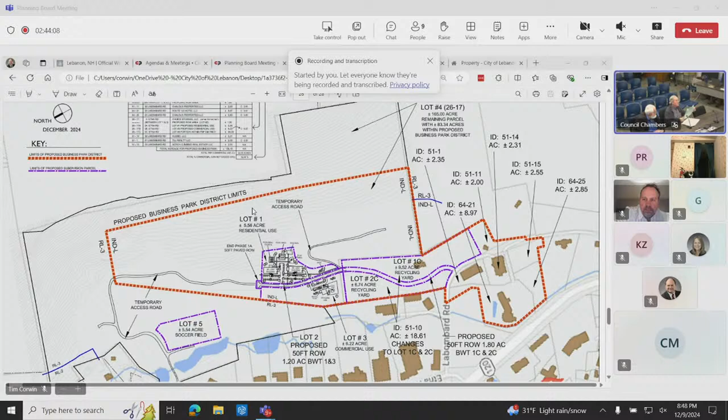Okay, well, I wanted to show it because it incorporates the northwest corner of the property for recreation fields for the city, and it incorporates a residential development that basically utilizes the rest of the remainder of the property for residential, with the exception of a couple of spots designated specifically for commercial that relates to the residential, for example a childcare facility and that sort of thing. The recreational piece is here.

As I explained before, the proposal being put forward after the subdivision is created will be to create a privately funded TIF district, an important piece, that will pay for the build-out of the recreational facilities as well as the infrastructure for the residential. A portion of the taxes for which will support those two things will pay for putting in the soccer fields and recreational fields as planned, and the sewer, water, and roadways for the development. One reason we have not done the full build-out plan is because a critical piece of this property is where the city is going to have ownership, and I wanted to have the city involved in the design of that piece, since it's going to be their property.